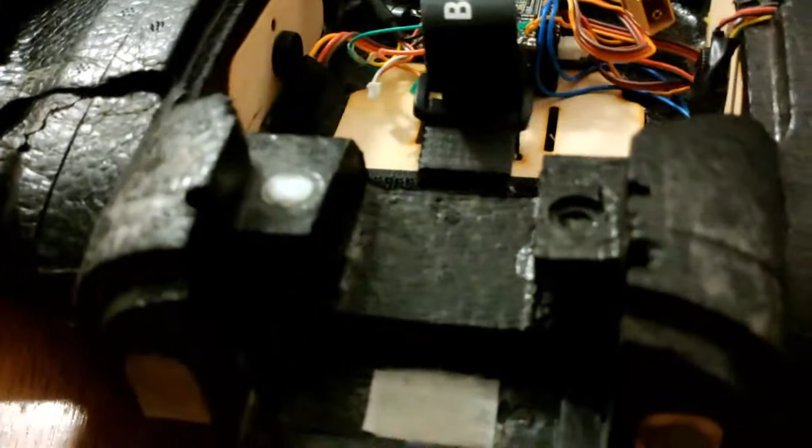So I'm going to show you the camera in a bit, and I want the camera PCB to go here and the camera itself to go in here in the front. When you're closing this, I want the camera to be in this hole here, just peeking through.

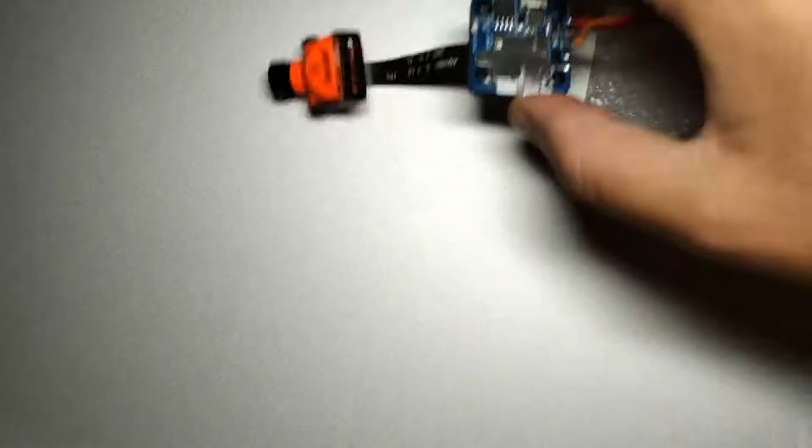So this here is a camera. It has a recording PCB, and this PCB is what's going to go at the back there to show you, and the camera is going to go in the front, below the hole, through the hole.

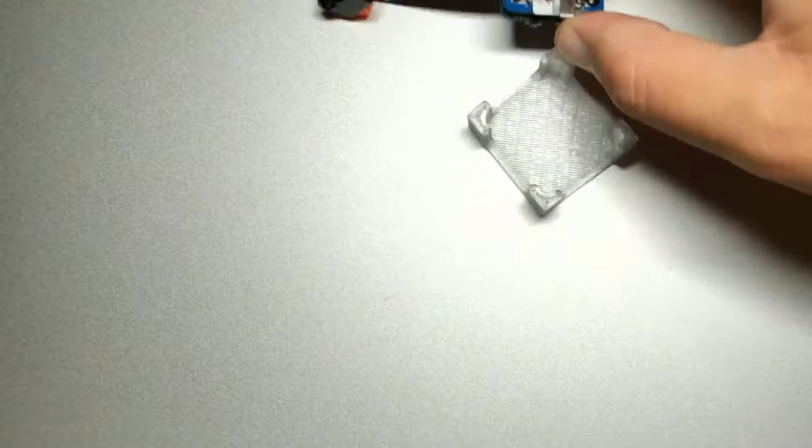So I printed this kind of holder, which I'm going to glue to the plane, and the PCB is just going to slot in like so. Unfortunately, I only have one hand here because I have to hold the phone, but yeah, it's going to go in like this.

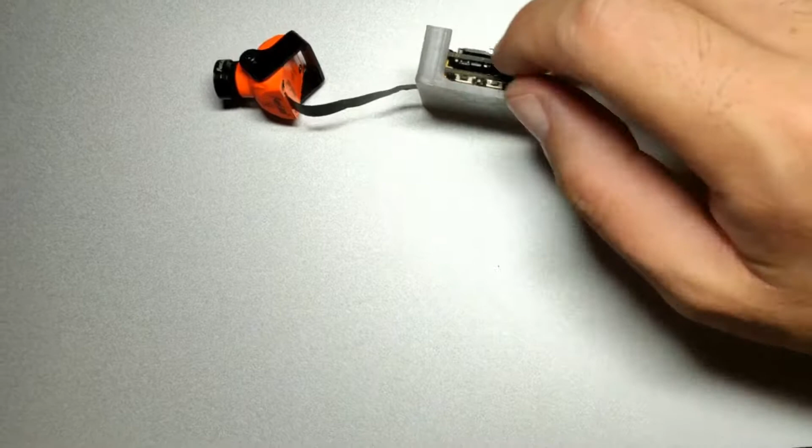Then this is going to get glued to the plane, and this camera is going to just kind of twist around. You can see that the ribbon is kind of not loving this. It's going to point out the front like so. So it's going to be like this.

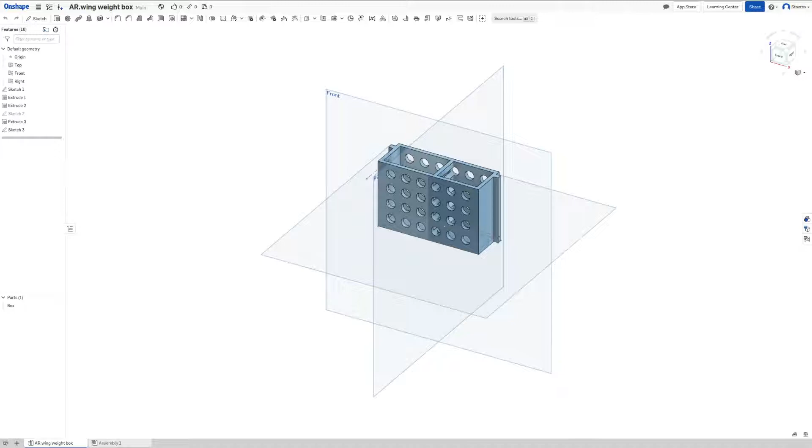My camera, for some reason, is not loving the white balance, so it's showing everything yellow, but it's fine because we're going to be looking at this window anyway.

So this box here is full of holes because you want the air to go through and reach the inside of the plane so it can cool down all the components inside, and also you want the air to go through and cool the camera as well, which is going to be around here.

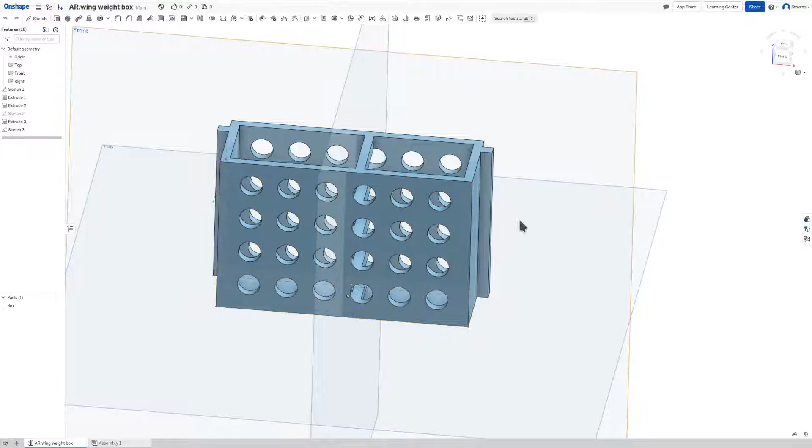So we're probably not going to use any of these things in the front here. But what we do want to do is make a space here-ish. I'm going to measure exactly how far the hole is from the side, and I want to make a space for the camera, so the camera is pointing directly forward here.

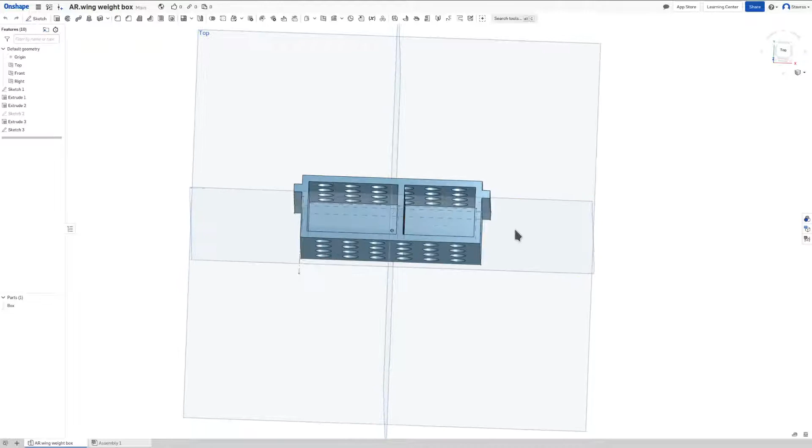And here I want to make basically a cylinder that will hold 1 cent euro coins, which I have calculated is the cheapest way to add some weight to the plane, because planes cannot fly if they're tail heavy. They have to be nose heavy. So in order to make them nose heavy, if they aren't, you need to add some weight, and the best way is to put some 1 cent coins here, and that way I can stack some coins up in a cylinder and add weight to the plane.

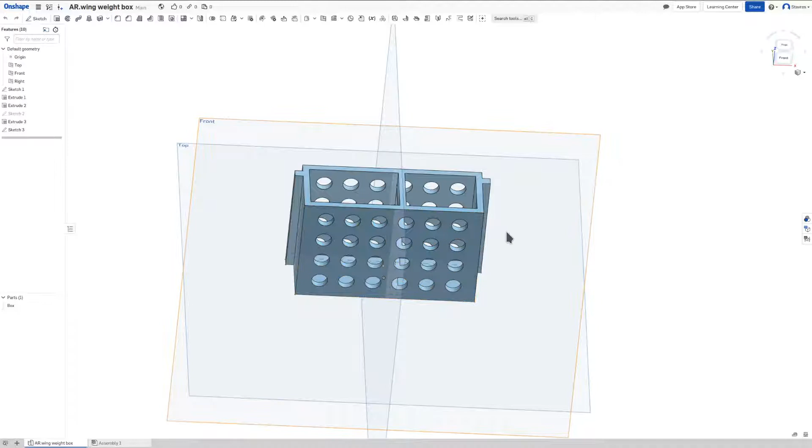It's going to have to be a good fit, or I'm going to have to find a way to make the coins basically not move, because if they start moving inside the plane, you're not going to have a good time.

So I'm going to start by just looking at the sketch, and the sketch looks reasonable. I mean, I still want to keep these dimensions because I've tested them and they're basically good. I don't want this thing in the middle here, so I'm just going to take that out.

The height is, what is the height actually? Let's measure. 44 millimeters, that's fine. Okay, yeah, that's correct as well. So, yeah, the maximum height is 44 millimeters.

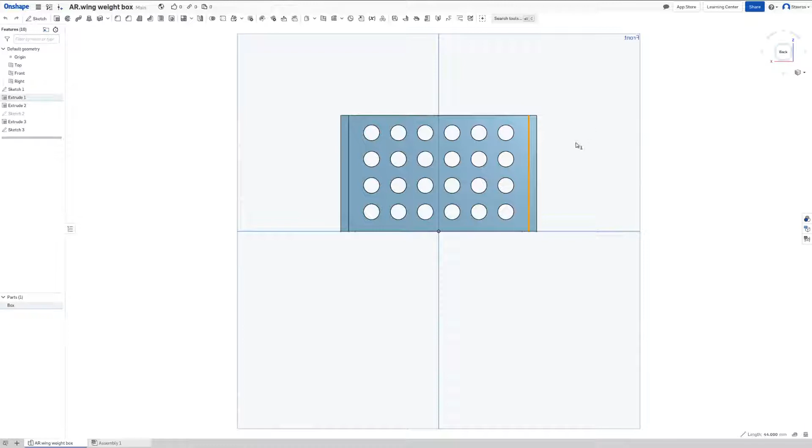Just something to keep in mind though is that I have changed the orientation of the nose that I showed you with a hole. The hole used to be up here on the right, now it's going to be down and left. But because I've changed that, this front side, this part, no longer fits. So this is basically going to have to not be there.

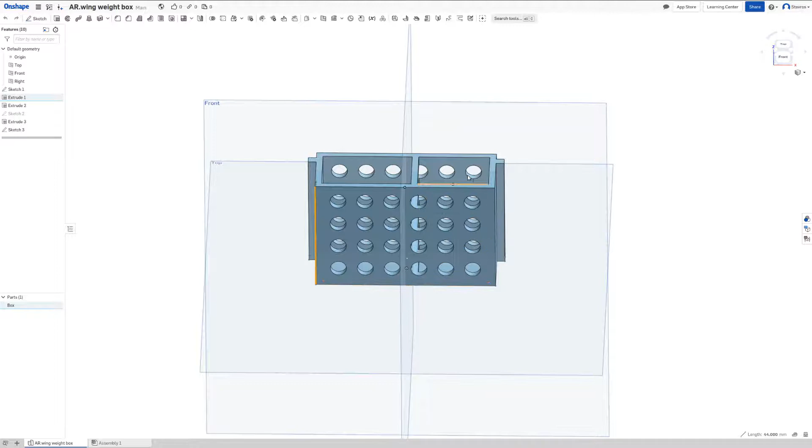Right now, with a new nose cover, this has to be kind of diagonal to go here. So I'm probably not going to use the whole front side. I'm just going to cut it and maybe place the camera here, the cylinder here at the back, and that's about it.

All right, let's begin. I've already made a version of this, so I can roll back. I've called it the first version. I can go back if I want, but I don't think I'm going to want to because, well, it's been okay. I can show you.

So this is the previous box. I had it printed, but I had to insert a camera, so I cut it up with some pliers to insert the camera. This is the printed box.

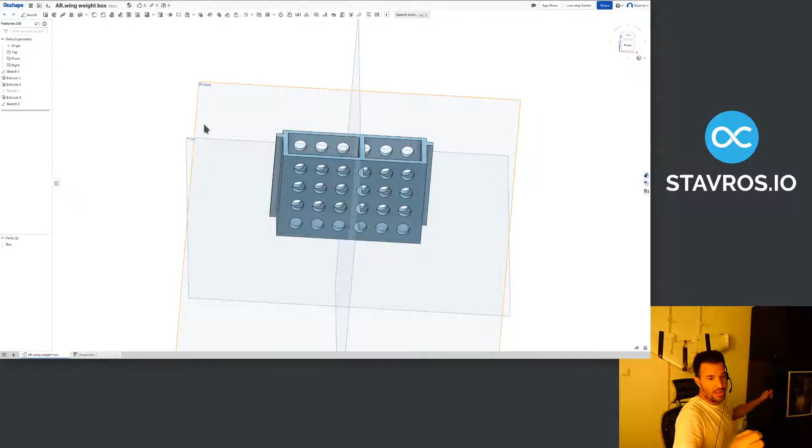So I'm going to design it to be 16.1 because I wanted to be able to go in, but I also wanted it to be kind of press fit. I don't want it to be able to get out easily. And then we'll see if that's enough or not. Maybe I'll have to put some glue or something.

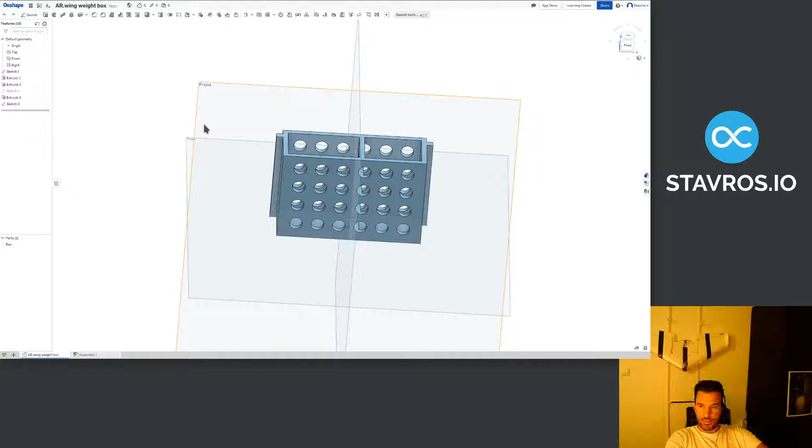This is the bottom, but I'm not going to do that. I'm just going to delete. These are the holes. No, I'm not going to do any of this. I'm just going to delete all these and keep the original sketch.

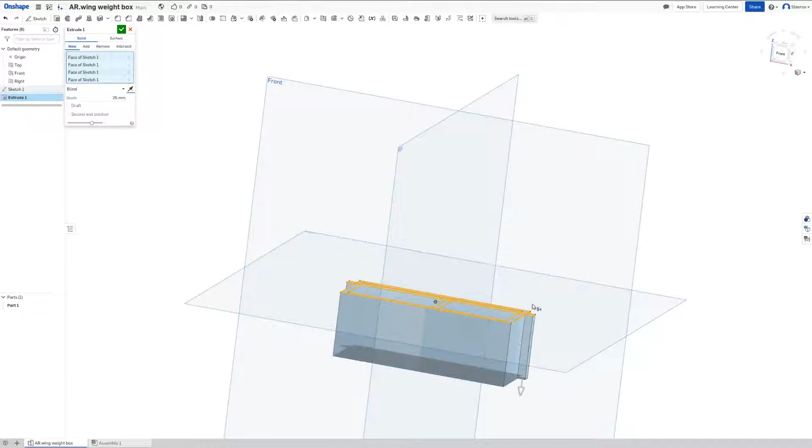Now I'm just going to extrude this one. I'm going to do the old trick of extruding the bottom downwards. Onshape wants you to extrude upwards, but I want to extrude the bottom downwards. Because then if I want to extrude other things, I don't have to calculate bottom height minus the rest of what I want.

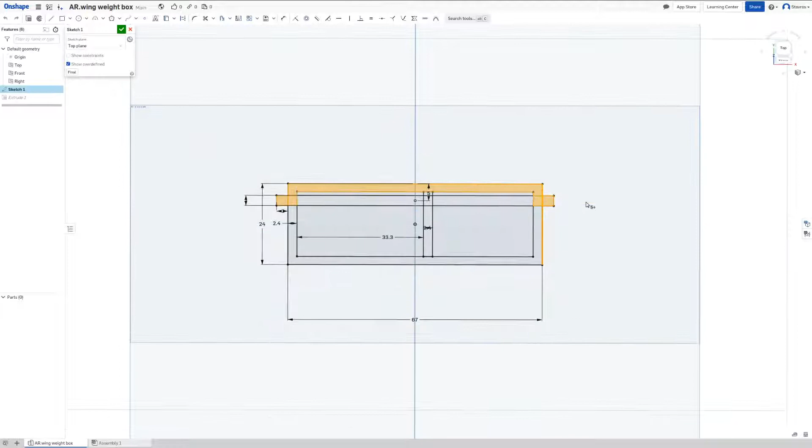So if I want to make the box itself, say 30 millimeters high, I don't have to include the bottom in that. I can just say the bottom is 3 millimeters, and then the rest can be however much I want. In this case, because we know we want it to be 44 millimeters, I'm just going to set 41, and extrude upwards the rest. Probably not going to extrude more than this. Just going to extrude this for 41.

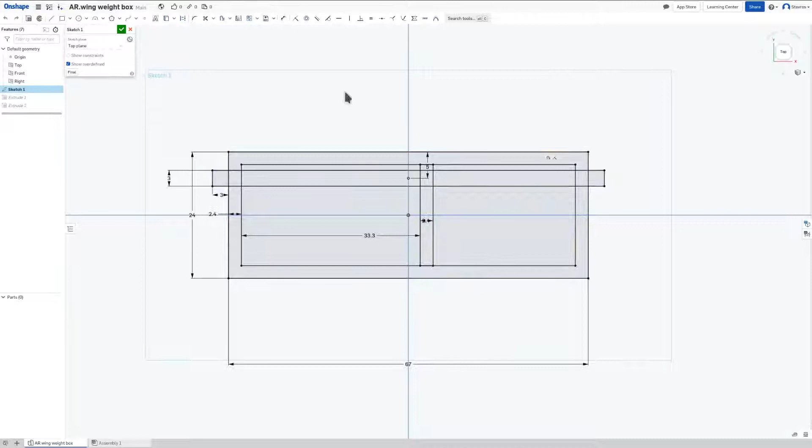All right, let's draw the cylinder for the euro coins. Let's just arbitrarily draw this here. This should be 16, 16.1. All right, that's pretty big. Actually, I didn't think it would be that big.

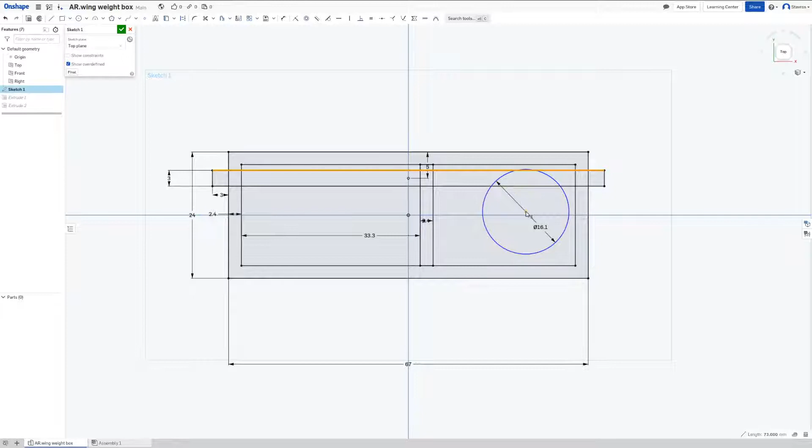We don't really need this space. We could just put it here, but I don't want it to block too much of the air intake. So maybe I'll just put it on this axis, and then here. Okay, this is going to be the inner hole, so I'm just going to draw an offset here of, come on, Onshape.

2 millimeters, okay. Yeah, this goes a bit too far out. Huh. I guess maybe this doesn't have to be on the axis, so I could delete this constraint and move it out. Probably want to do this and then just touch it.

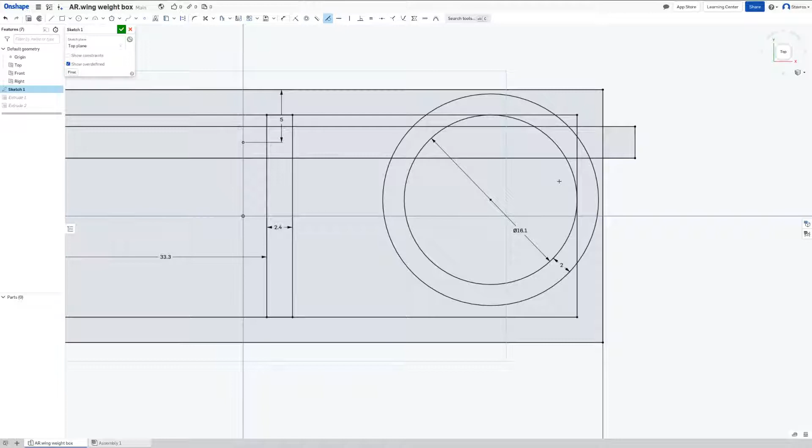Could maybe make this circle and this line tangent, and then this circle, the same circle, and this line tangent again. So now what we can do is extrude this circle. What's going on? This is just not loving anything. There we go. Oh yeah, I forgot I drew the circle, so I had to redo this.

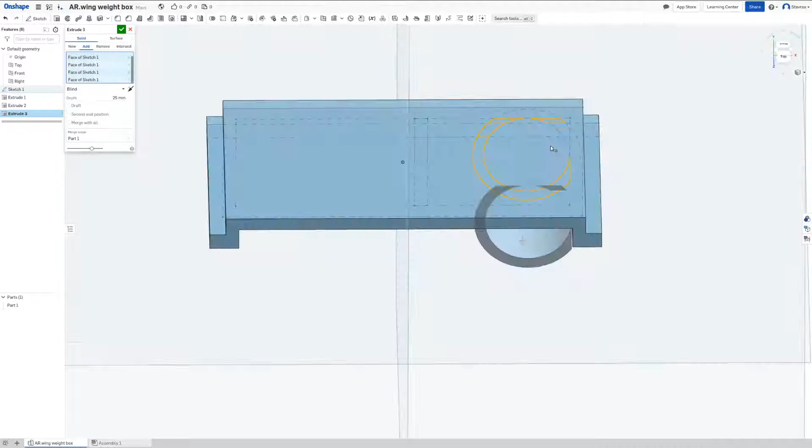Let's pick the correct things to extrude here. Yeah, I think this is reasonable. All right, and now we can extrude this circle. I want to extrude all of it. Well, I guess I might as well. Actually, let's go into the sketch and select what we want to extrude, because otherwise it's a bit annoying. I'm going to just choose all of this, because why not?

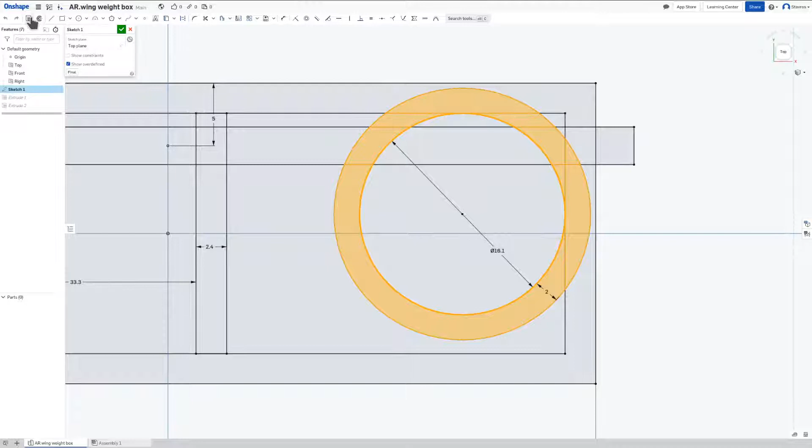So I want to extrude it, but I don't really want to extrude it too high, because I'm not going to put that many coins in there, and I don't really want it to cut all my airflow. So I guess 10 millimeters is not fine. No, 20. All right, and if I put in a few coins, then maybe I can put something on the top to kind of close it, like a stopper or something.

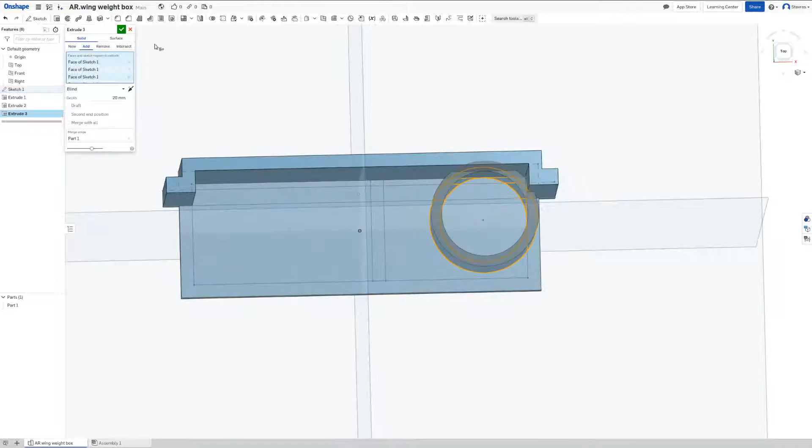Another thing I could do is add cuts here. So in the sketch, I could add a rectangle from here to here, to basically... is that correct? That is not correct.

I can add a rectangle. Actually, I'm going to do a center point rectangle from this center to here. And basically what this can do, apart from screw everything up, is cut the circle, the cylinder, into 2 parts.

This is incorrect, but we can fix it. Can we? Oh yeah, there we go.

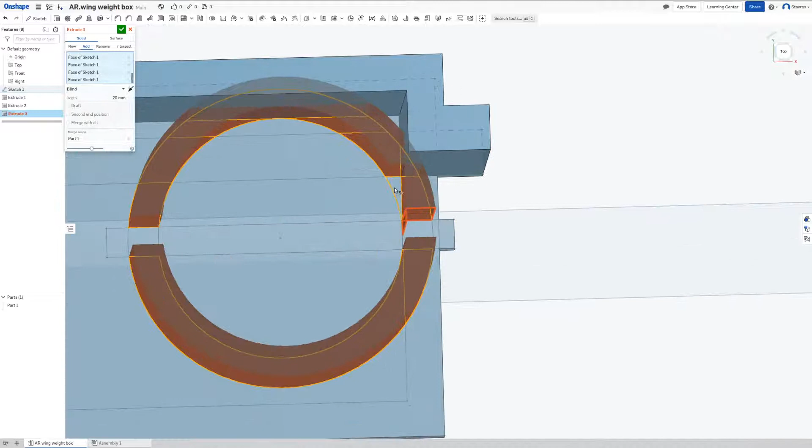Because this is 2 parts and it's kind of open, it can flex more easily. So we can push the coins in, even though this is exactly the dimension of the coin. This will kind of open up and squeeze the coins in.

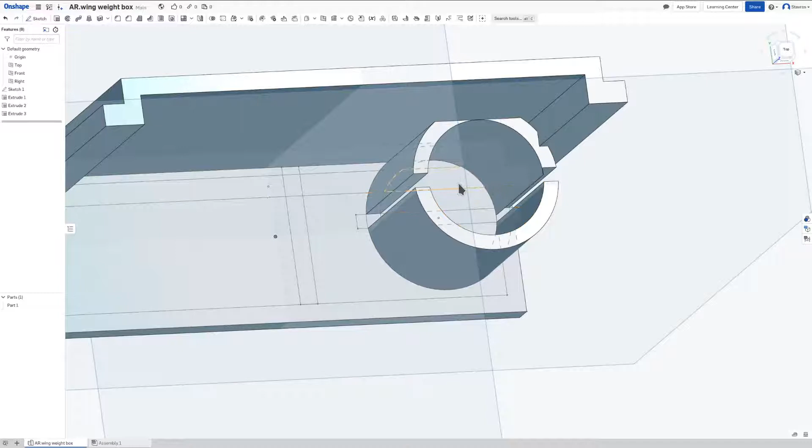Though now that I think of it, the bottom coin is what's going to be holding this open. If the dimensions are too big, the bottom coin is going to hold this open, and then the top coins won't really be able to get grabbed by the sides. So I might as well undo all of this.

All right, I think this is fine. This is going to take a test print to figure out if I have all the dimensions correct. But this looks okay so far.

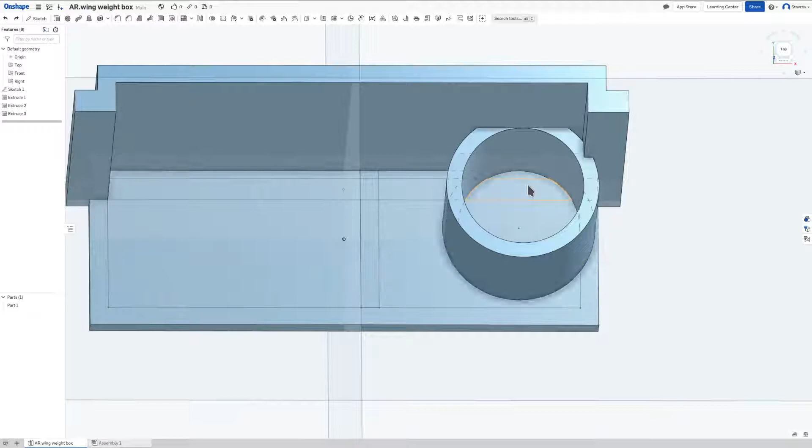I'm wondering if there's something I can do now to ensure I can close the top more easily. But nothing comes to mind that will still let the coin go in. I wonder if maybe I can add a slot here and push the coins in somehow, and then have this be topped off, closed at the top. But, probably not.

Anyway, this looks okay. This is what's going to be holding the box. Though I also kind of want these walls here to rise a bit, so maybe I'll do 10 millimeters.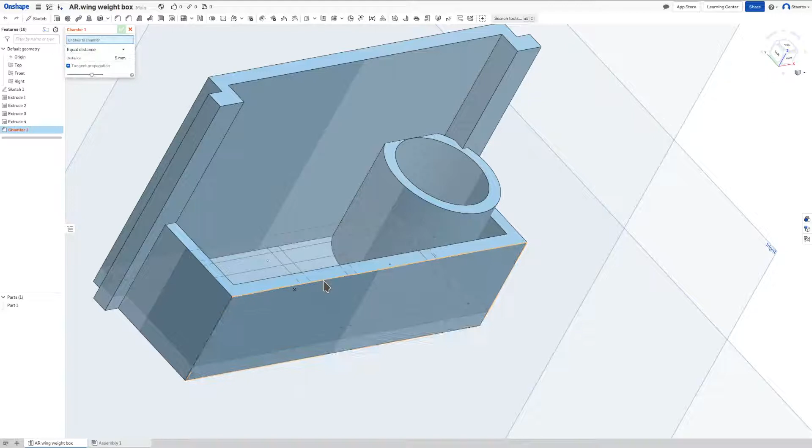I'm kind of afraid that because this needs to be sloping inwards, this is not going to work. But I'm thinking maybe I can do 15 and then do a chamfer, if that's how that's pronounced. Oh, there we go, yeah, okay.

Yeah, this looks probably okay. Distance should be 15, yeah okay. Angle can be 20, can it? Yeah, okay.

Alright, distance can probably be 18. I should use variables for this, but I didn't. Yeah, okay, this looks reasonable.

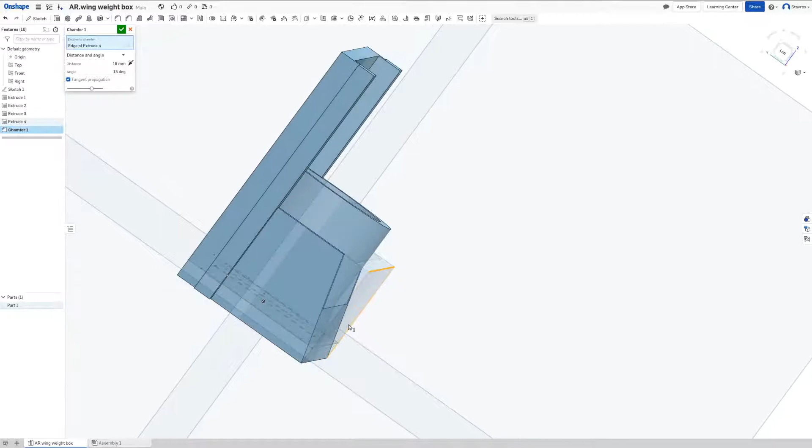We can do this at the end, but I'm just gonna leave it for now, to make sure we don't have anything that will block us. We can use this to cut the final thing, because I see that the cylinder itself is probably too far forward, although I don't think the angle is that extreme.

This is going to take a few test prints, but I think this is okay. The cylinder looks too high now. I should probably be naming my things. Yeah, let's name things.

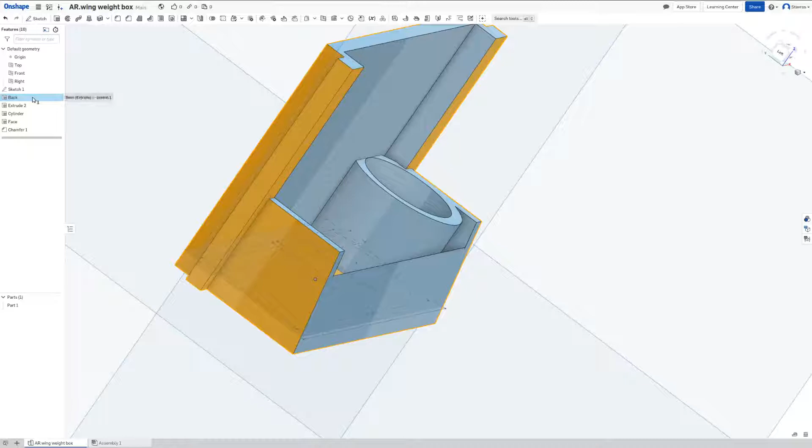Is this the, what is this? This is the bottom, isn't it? Yeah, this is the bottom.

All right. Now I need the camera to be here. Let me measure, let's measure what's going on.

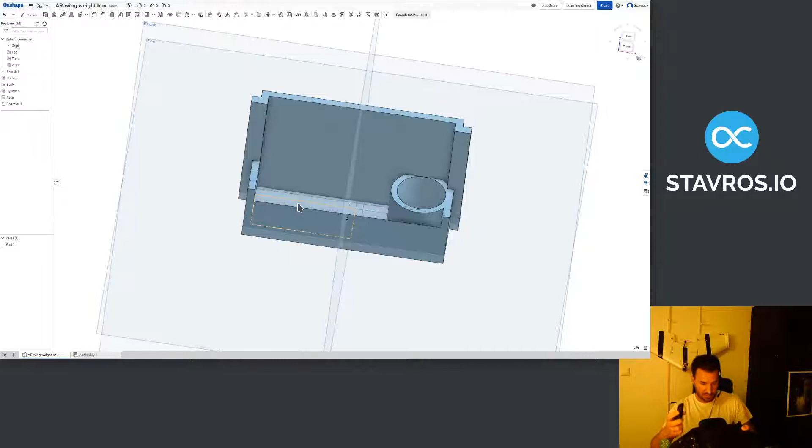All right, so you can't see this, which sucks, but one of these days I'm gonna design a mount for my camera onto my lamp, and I'll be able to show you more things.

If I just align this here, you can see that the center of the camera is about 15 to 17 millimeters from the side. And measuring the height is going to be tough, but it kind of looks like 16 millimeters, 17 from the left and 16 from the bottom.

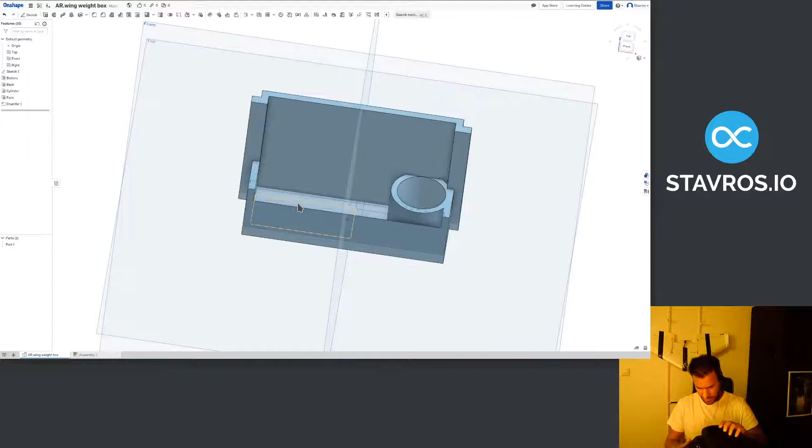All right, so let's see if anybody's watching, which I don't think they are. Yeah, all right.

So what I need to make here is a thing that will fit the camera.

Alright, so I'm going to have to measure the camera, but to measure the camera I'm going to have to unscrew the holder, or do I keep the holder and be able to change the angle of the camera? To be honest, I kind of like that idea. Yeah, I think I like that idea.

You can just use the holder and screw it down. Although it's gonna make the camera fold more easily, which might actually be good because that will break the mount rather than break the camera itself. So yeah,

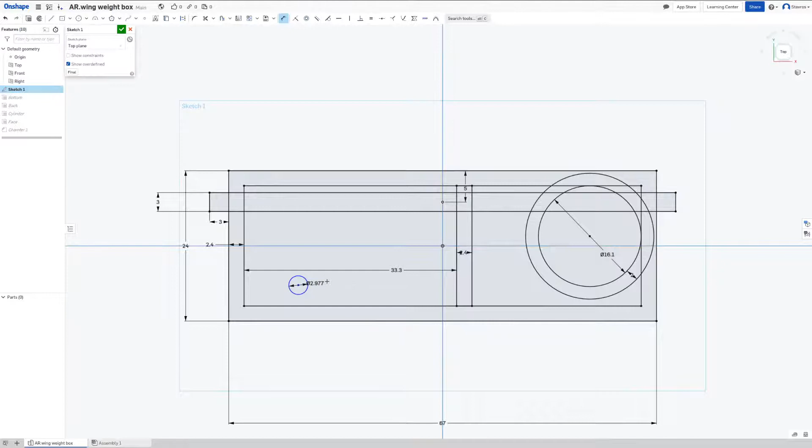Anyway, all right, I'm just gonna make a circle. Let's make a screw hole here. Let's call it 2mm, which is gonna be enough to screw the screw down. Hopefully this hole looks tiny, but I hope it's 2mm.

I could measure, but it's too small. And all right, let's. Next to the hole, it has 2mm from the hole on each side.

There are slots, which are 1.7mm wide. So those look kind of like rectangles. So I'm gonna draw a line,

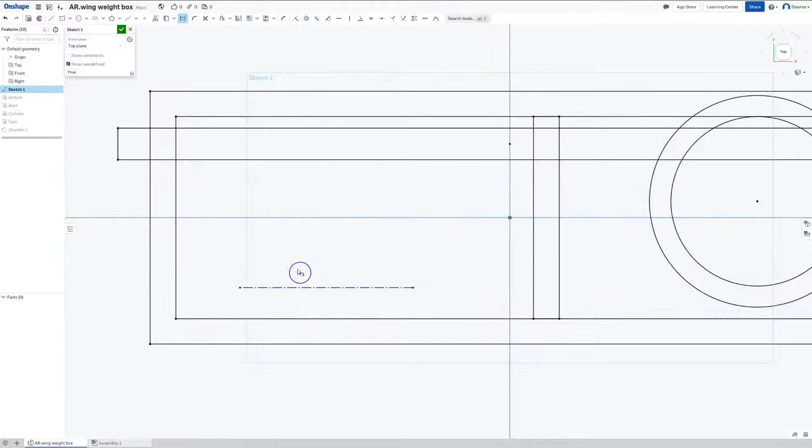horizontal line, this is gonna be a construction line. Put the circle on the line, hopefully, if I can ever do that. Yeah, well, alright, fine, coincident. There we go. And now I am going to do a center point rectangle here.

This is... 6mm wide. I'm gonna say 4, just in case. I'm gonna say 4. The distance from this to this, I want to make 3. I want to make.

Do I? Probably. Yeah, and now I want... Okay, this is 1.7 as well. I'm gonna make it 1.5. I guess that's okay.

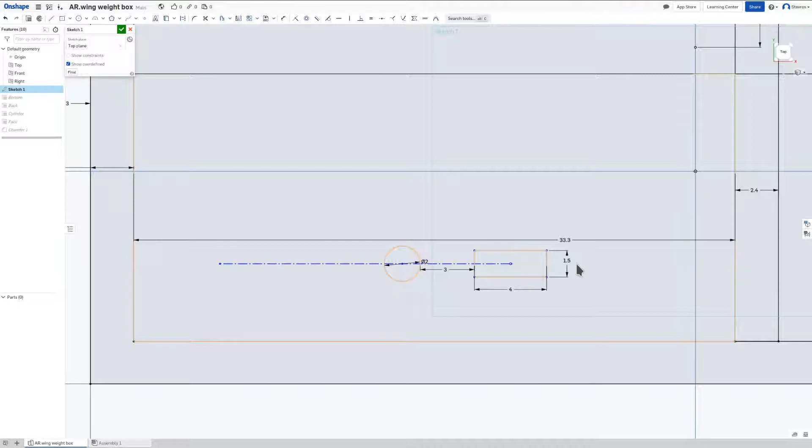My nozzle isn't gonna be able to do that, is it? I'm gonna go 1.2 because I have a 0.4mm nozzle. So no, 1.2. I would have gone to 1.6 because this is a bit too small, but I don't think it's going to be able to do that.

Alright, now one more. Do I need to do one more? No, I'm not going to do one more. I'm going to draw a vertical construction line, which is coincident to this, and now I'm going to magically mirror this thing. There we go.

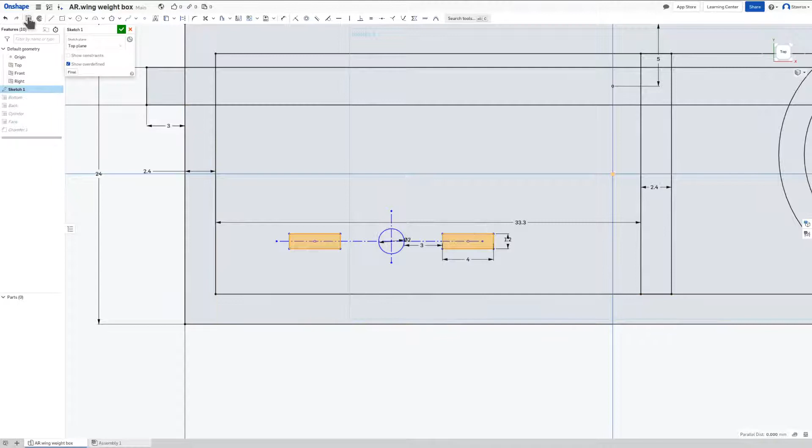All right, and now these two, what do you call them? Parallelograms, anyway. They're going to be extruded up. I want to extrude them up so they can hold the camera from turning left and right.

2 millimeters is probably too much, but that's okay. Why am I making new parts instead of adding? Oh, I know why I'm making new parts. It's because the bottom doesn't have these holes.

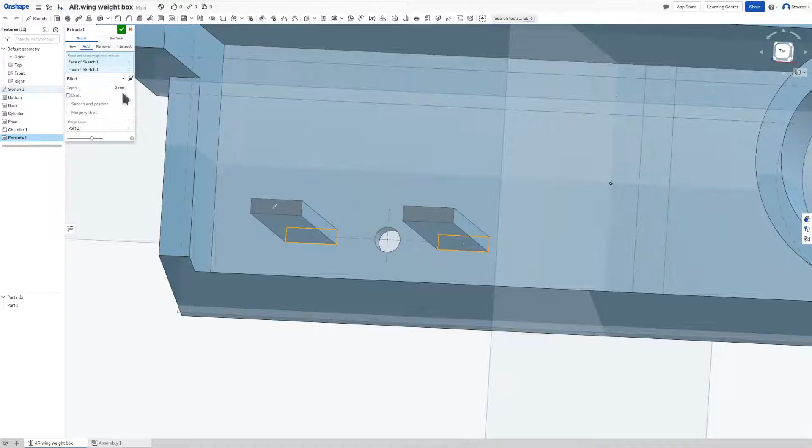Okay, yes, this is what I want here. I want a hole here, but the other two I want extruded instead, and I want them extruded upwards. Oh, come on. And so this is where that bottom trick comes in, because instead of having to say 2 millimeters plus however thick the bottom is, I can just say 2 millimeters because the bottom is extruded the other way down, and this is up.

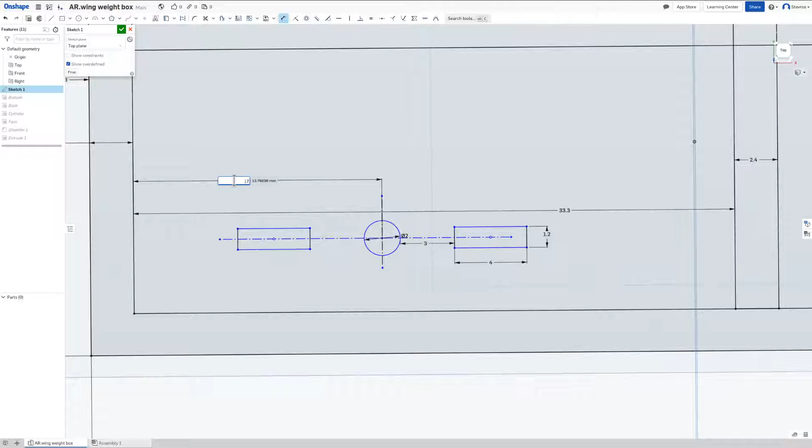All right, these are okay here, and now this should be, if I remember correctly, 17 millimeters from this side, which is, yeah, that's fine. And how far from this side? That is a great question, Arthur Barry. Let's say 10, maybe. Is that too much?

Let me simulate. Yeah, I have no idea. I'm gonna have to print this and check. Okay, I mean, it looks okay. Does it look okay? I can't really show you this because my camera doesn't work, but let's see.

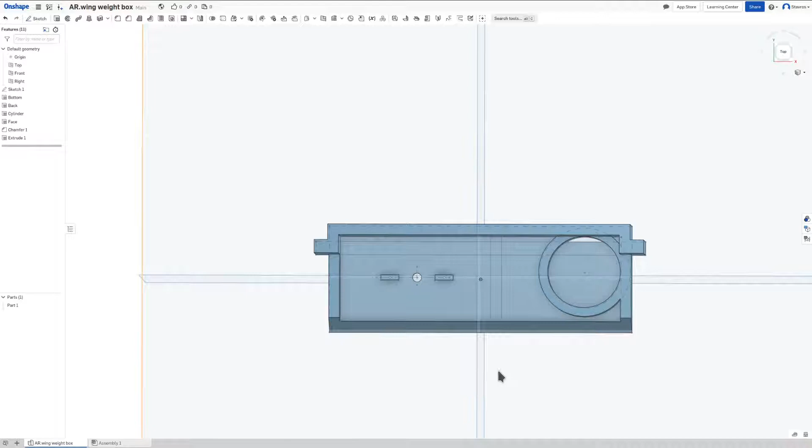Right, this is actually exactly the middle. That's okay, and if this is the middle of the box, the camera's going to be that way. Yeah, this looks pretty spot on actually. That's good. All right, okay, cool, let's do that. I'm going to have to worry about how I'm going to screw the camera in later, but for now this looks okay.

All right, one more thing now that I want is I want the wind to be able to pass through into the back of my plane, over the PCB and over everything else. Even though it has air intakes at the top, I still want the air to go through, and I measured that before, but I'm going to measure it again. This is 13 millimeters from the bottom, and it is 38 millimeters wide.

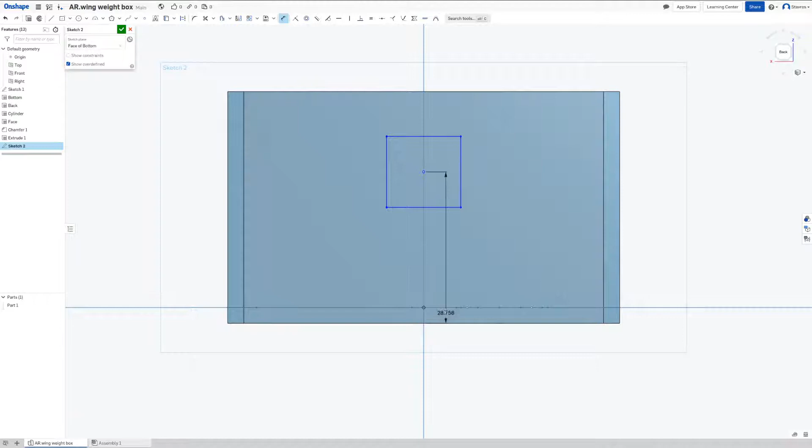So I'm going to cut a hole in the back wall, 13 and 38. I'm going to go here and sketch onto this back here. I'm going to make a rectangle this big. So this is, it's actually 13 from the very bottom. So this is 13, and then this is 38, and I suck because this is not 13 at all. This is what is 13. There we go, 13 now.

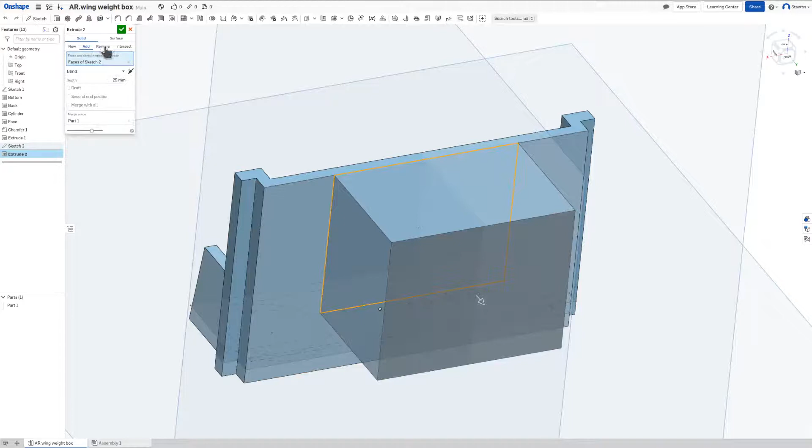Okay, and now this we draw to here. We didn't use it though. We need to use this line so we can actually put stuff on it. And now they're coincident. And now that this has been drawn, we can take it and extrude it, but remove the other way. There we go, that is too much.

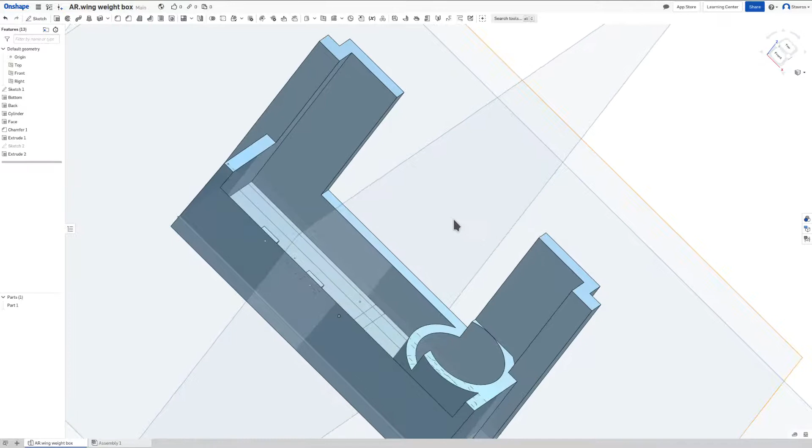I don't like cutting blind, but I forgot. So up to next is fine because we only wanted to cut up to the next face, which is just this one. Oh shit, it cuts the cylinder as well? Why did it do that? We said up to next. I guess it thinks that that's the next one.

Oh, damn it. Alright, I'm just going to do up to face and click this face. So yeah, now it only cut this part. The cylinder isn't looking very happy, but whatever, should be fine. So now that we have this, I kind of doubt how much this front face adds. So it's not... I do want the sides, I just don't want the front face.

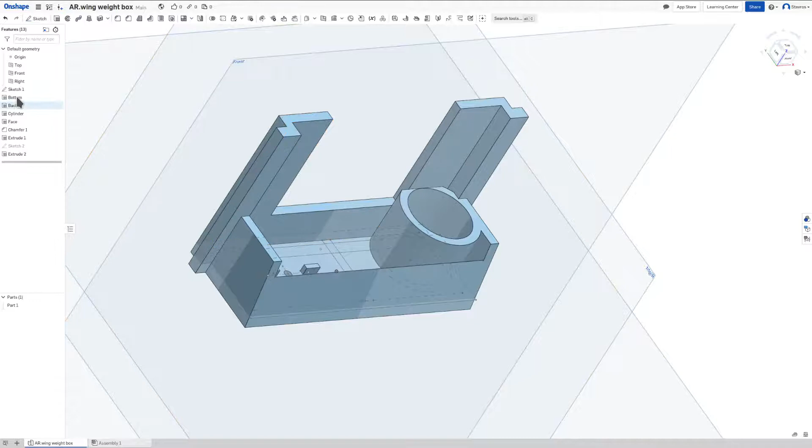Since I don't want the front face, I should just... I don't know, do I want the front face at all? It's going to provide some resistance if I crash it. I don't want the nose to just be empty behind, because sometimes when you land you might hit a sign or something, and I wanted something back here to hold the foam in case it crashes, but I don't want it to be this much. This is going to block the camera as well. I'm not sure I want to cut.

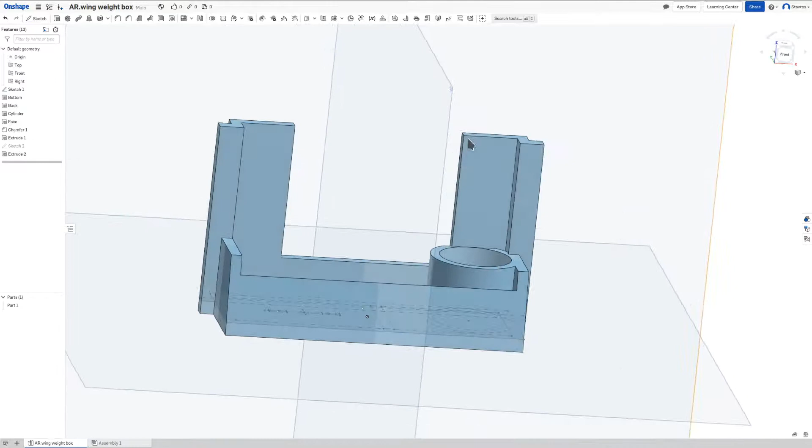Having the box take up all the space was convenient, because it was protected, but maybe I should just do that. Maybe I should make the entire face and then cut a piece where the camera is, because I only need the camera hole here, the rest can just be wall. I don't really crash that often, although now that I said it, I'm just going to crash next time. Yeah, I'm going to go without this face. Or am I? Fuck it, I'm just going to cut a piece. Oh, this is terrible. I am terrible at this.

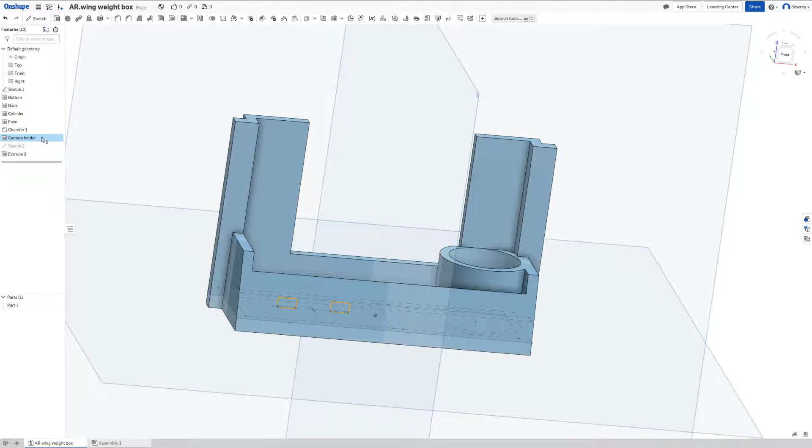Alright, now we've renamed the stuff. This looks okay.

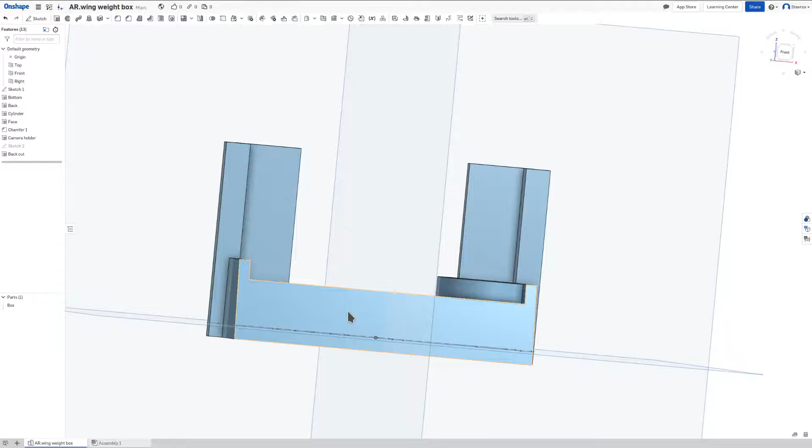Is this even gonna... how tall is this? How tall does a camera need to be? The camera is 8 millimeters from the very bottom. So is this taller than 8 millimeters? Even? Yeah, it's 10, okay. Alright, it's 10. I don't even know if the angle is correct. It kind of looks correct, but I don't really know. Maybe I should just chamfer it more.

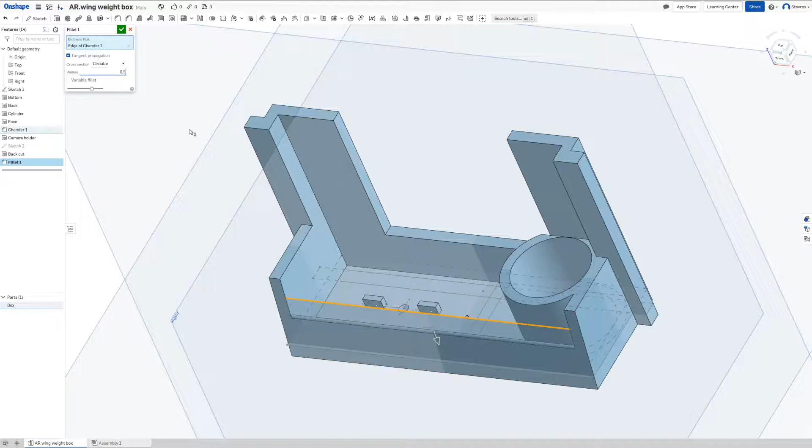Alright, this is getting stupid. I am just going to... okay, alright, I'm gonna fillet this thing here. Boom, that was not what I wanted. But if you fillet less, you can make a wall like you want, because I don't want this razor edge, I just want it to be a bit less razory. I think this is fine, I think 0.5 maybe, let's do 0.5. Oh yeah, okay, yeah this is fine. I am quite happy about the solution.

Do I want something for the camera to rest on? I don't, because I want to be able to change the angle.

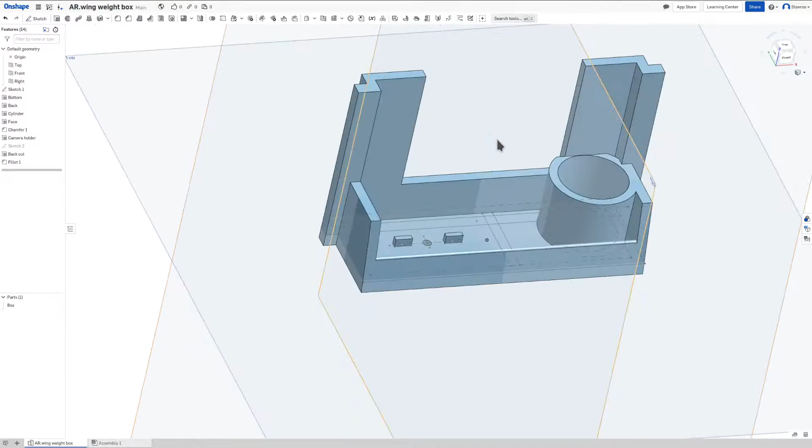This is going to hold it just fine in the grooves that the plane has. For the nose, this is going to expose the back PCB, so the wind's going to go in here and then go back through here. My little wall here is fine.

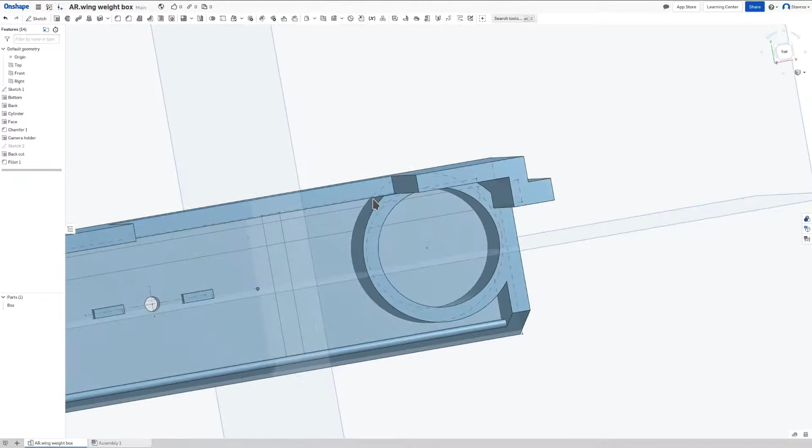Yep, I think this is ready to print. Is there anything else we could do?

What we need to do now is fillet the edges, because if you don't fillet, this corner here, if you try to pull this side and this side, the corner is just going to split. So you put a fillet to distribute the stresses. We don't really need this because there's no stress going this way, but I just like adding fillets, it makes everything stronger and not as pointy. I don't want to cut a finger on the plastic.

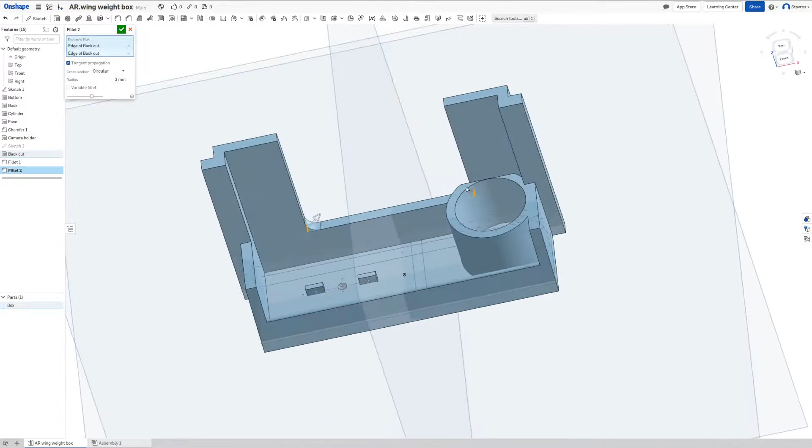So one fillet there is good. Oh, these ones need to be filleted as well. Probably not 3mm, that's too much. Let's see, yeah it's way too much. But another fillet here. Here, come on, here and here. This is not at all the side that's going to handle the stress, but it's better than nothing.

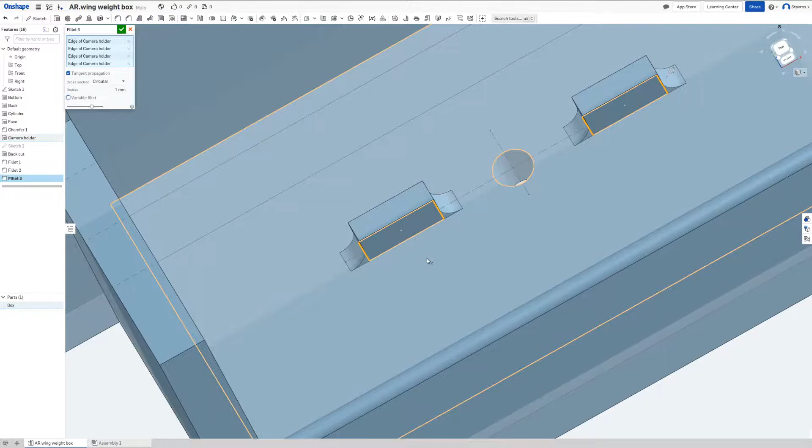The stress is going to be on this side, back and forth, back to front. But I'm just worried that this is going to make them not fit. I don't want to add this fillet here. Okay, this is something that might take stress as well, these corners here might take some stress. Let's see if... oh nice, okay, it handled that quite well. Is that gonna... no, this is not gonna work, okay. Fair enough.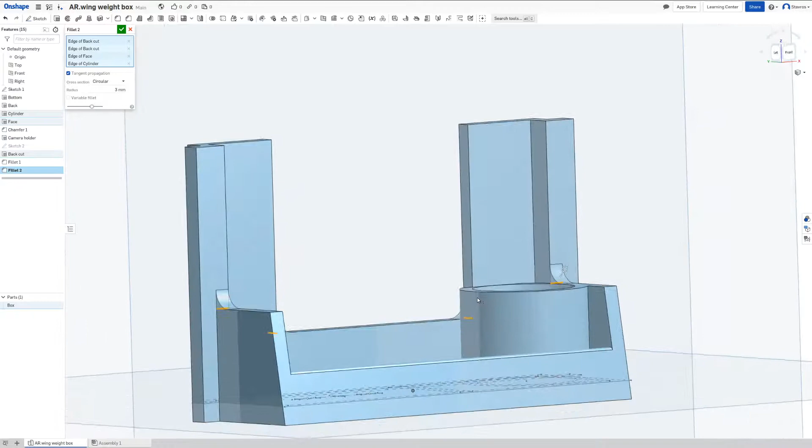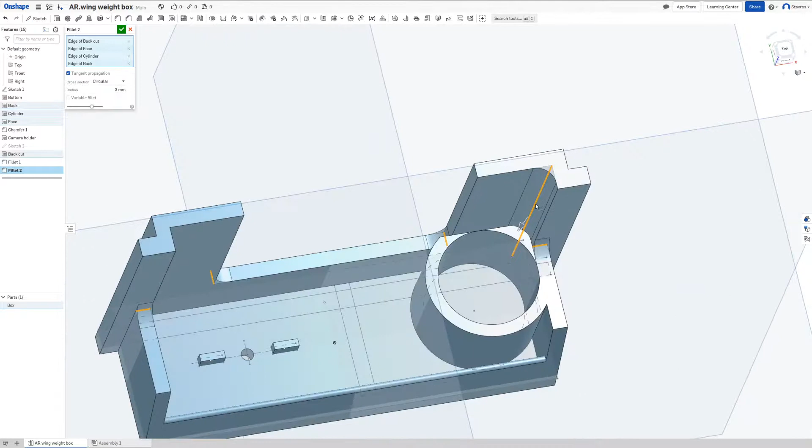Yeah, I think this is fine. I could add a fillet here, but then I'm just gonna... what, no, here. But then it's just overkill, I don't really need to do that. I wonder what happens if you do this. Huh, okay, yeah no, these are not necessary. Arguably none of these are necessary, but I just like adding them for strength.

Yeah, so I think this is good enough to print. But I'm gonna, well, actually, let's download it.

Let's open the slicer. I'm using PrusaSlicer. Let's load it. What do we call it? AR wing weight box - there it is.

Since I'm going to make a test, I want to do a test print just to make sure all the dimensions are correct and that this is good. Basically, I don't really need the bottom too thick. I only need a small slice, from the bottom to maybe the top of these things, and some of the coin box here.

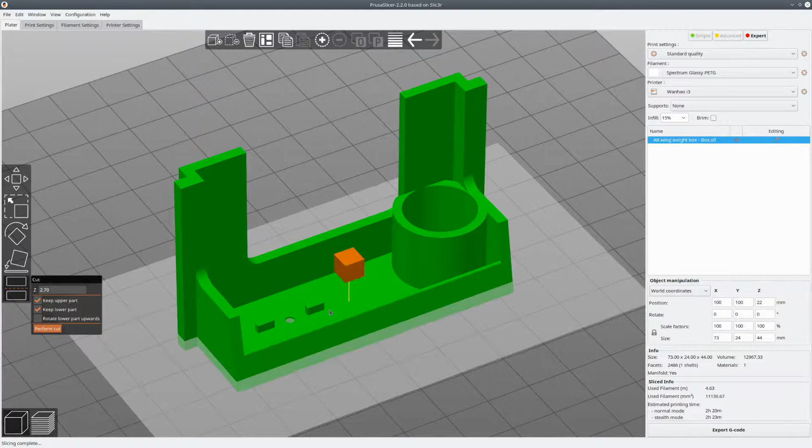So I'm just going to cut it. I'm going to do one cut at the bottom - this is 3mm, I'll cut it. 2.5, I'll cut - yeah, this is fine. I just want the upper part. Cut this, and another cut where I keep the lower part.

So I want enough that I'll be able to insert a few coins and check. This is okay - 6 millimeters is fine. I'm going to print this and try to fit it in the plane, see if I can tell if this angle is correct here. I think it's going to be okay.

Check if I can tell if this angle is correct here, insert a few coins in here, try to screw the camera in here, and then if this works, I'm going to print the whole box.

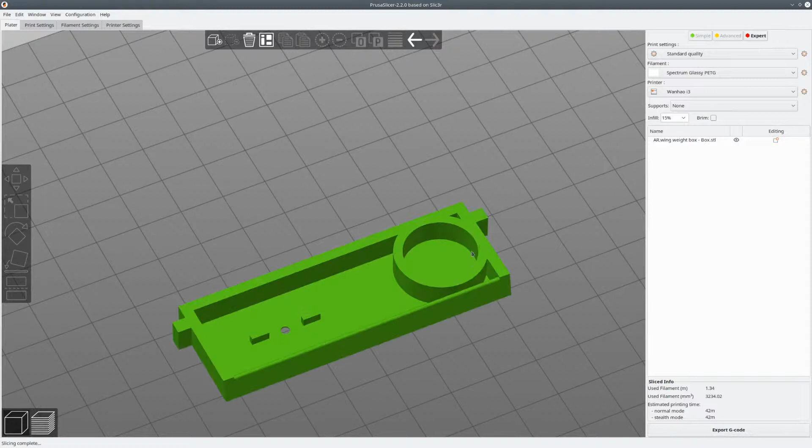I have a printing preset that's draft quality, and when you try to print it you'll see that basically everything is hollow - there's only like 2 perimeters. This is my fast preset.

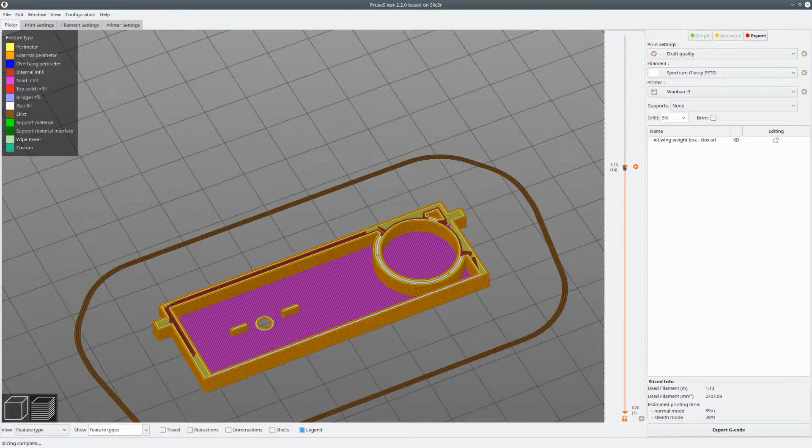Sometimes, because this wall is kind of hollow, I might be able to insert coins and have the wall flex without realizing it's not good enough until I print the final version - then realize that because the wall can't flex now since it's more solid, I can't fit the coins in. But usually you can heat it up with a lighter or something and push them in, and they're never coming out. Hopefully you won't ever have to take them out.

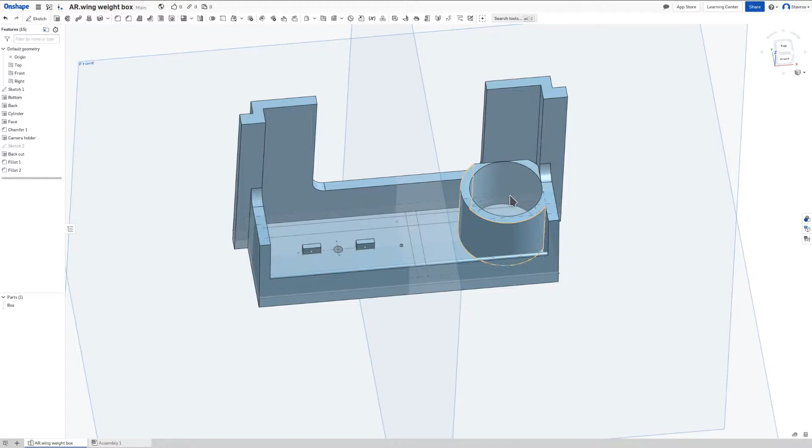Oh shit! Yeah, okay, so because I might want to take them out at some point, I need to make a hole here, just so I can insert a screwdriver or something and pop the coins out, because I'm never going to be able to get them out again.

There we go, okay, 5 millimeters is fine - probably going to do the right thing. So now I can insert like a screwdriver in here and push the coins out if I ever need to take them out. Although, to be honest, I think the weight of the PCB and the camera is probably going to be enough, because I only had 2 coins here anyway.

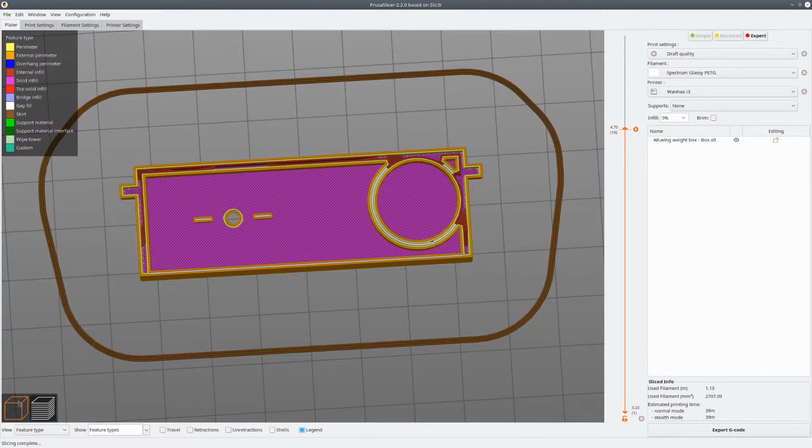Exported, remove - I'm going to have to do everything all over again, but it's worth it for the idea.

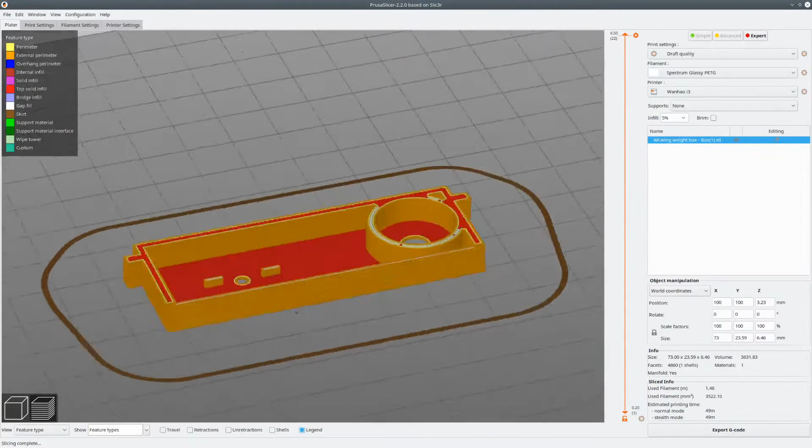I think 2.3 I'll cut, because before it was only one single layer. Now I'll keep the lower part, 6 point something millimeters - probably higher. There we go, yeah, I think this is going to be okay. Draft quality, yeah okay, this looks good enough. I'm going to print this and hopefully it will be okay.

I'm not going to live stream the rest, because I think it will only take a few small tweaks here and there. Yeah, I think this is probably going to be fine.

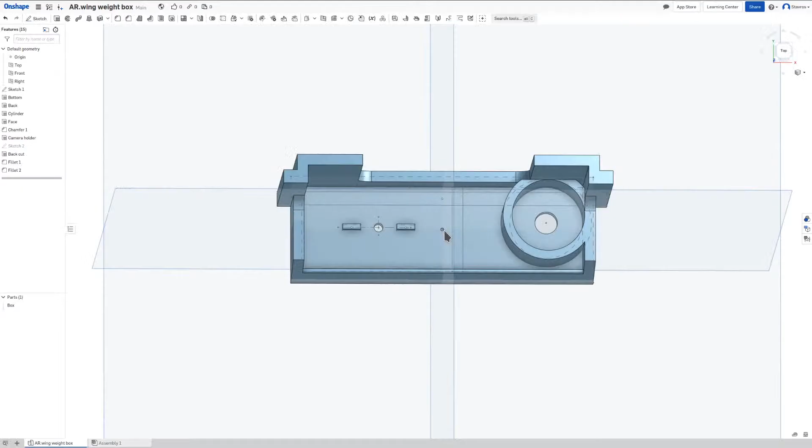I wonder if this corner here needs to be filled in, because this just slows the print down - there's no reason for this to be here. I can extrude this into the cylinder and fill it in, but I have to be careful to extrude everything. There we go, yeah, there we go. Okay, that's much better, because now the printer can just go faster.

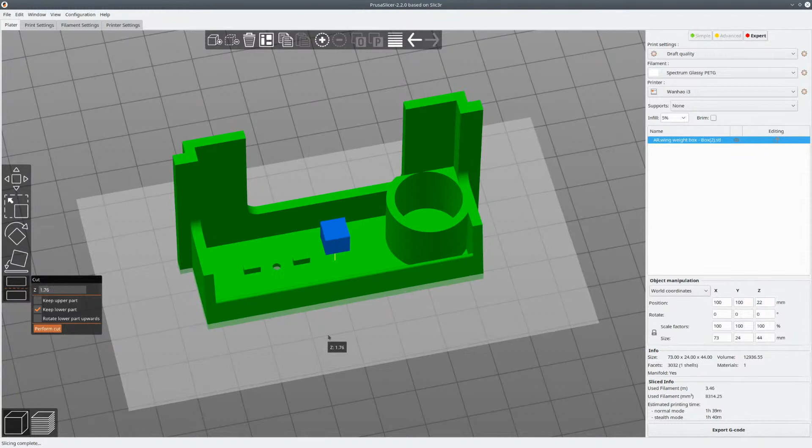Alright, let me redo everything again. Alright, cut - this is boring, but whatever. 2.4 is fine, keep upper. Now keep lower. Alright, this is fine. We have draft quality, don't we? Yes, we do. Yeah, there we go.

Now you see, all this back area here is hollow - the printer doesn't have to do any work there, and when it's solid it's still going to be faster, because it's not going to have to draw the triangle, it can just fill it in.

Alright, yep, this is quite a good test. How many layers at the bottom? Yeah, 1, 2 - want 2 layers. 2 layers is fine for a test.

Okay, this looks great. Alright, I'm just going to export the G-code, save it to the printer, rename, save it, and this is done. I'm just going to go print it, and I guess I'll tell you next time how it went.